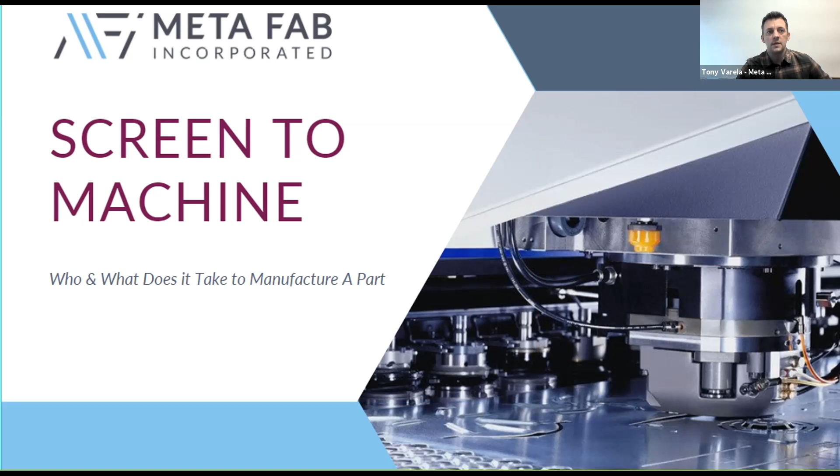So with that said, we will get into it. Today, the talk's called Screen to Machine, and basically it's who and what does it take to make a fabricated part. And what I mean by a fabricated part, in our world, it's sheet metal. So, taking large blanks of sheet metal, cutting them out, forming them up, and what do they ultimately become?

So today's agenda, my hope is your takeaway from today's conversation would be an understanding of the different types of sheet metal that are out there. It ranges from structural sheet metal, which we all come in contact with in large commercial buildings or schools, thinking of stairways, railings, large heavy steel. We don't do any of that here at MetaFab. We do real thin gauge.

So the whole world goes from large structural sheet metal all the way down to really thin gauge sheet metal, making boxes and enclosures. I also want you guys to get to know your local friendly neighborhood fabricators, and if you're coming from across Oregon, then your local statewide fabricator. Also, I want you to understand the whole process from design intent all the way through to the quality inspection and delivering good parts and what it takes.

We'll take a look at a couple examples of what it looks like as parts go through the different processes. And then at the end of the day, hopefully I'm leaving you with some resources where you guys can learn more, maybe classes you can be taking as you think about the next level, whether it's community college or a four-year university, or going straight into the workforce. So we will jump in here.

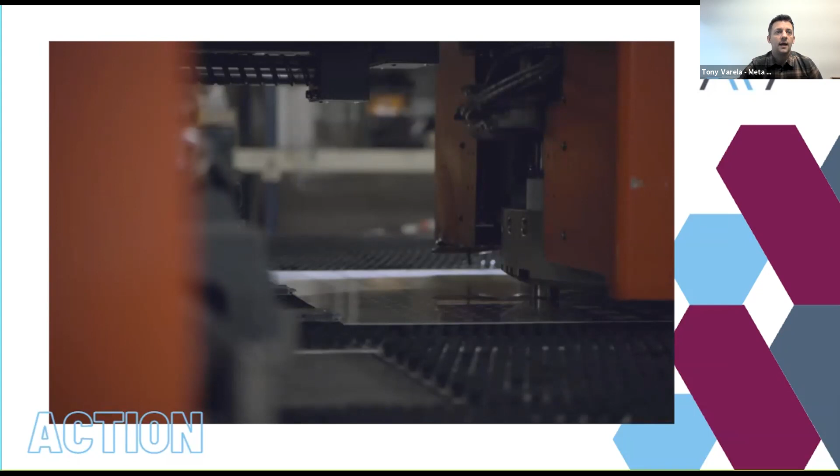So yeah, I've got some videos here. Like I said, it's the technical side of it. I'm gonna see what I can do to share that, and let me know if we have any issues on your end. So I'm gonna hit play here. You can let me know if you can hear it all right.

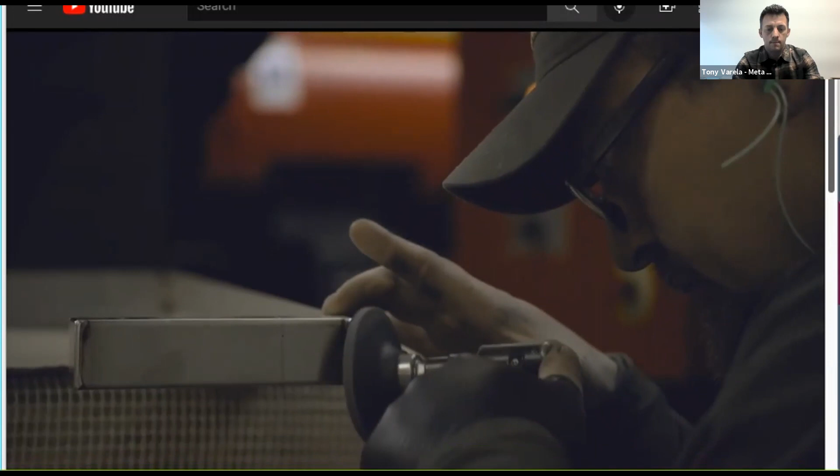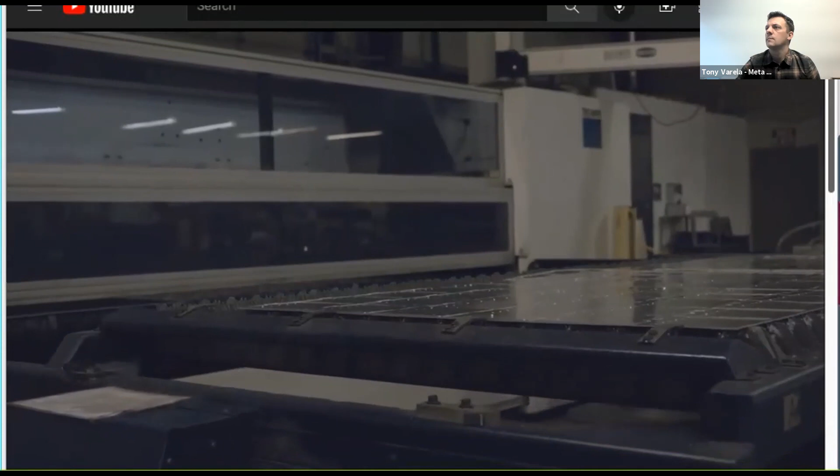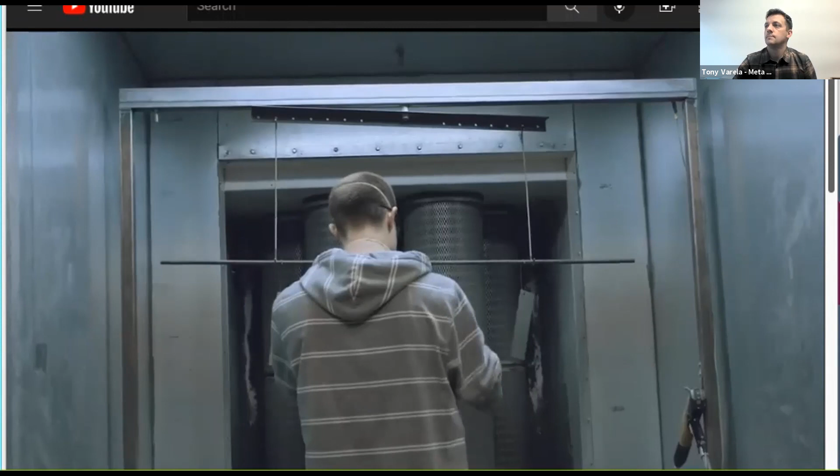MetaFab is a quick-turn, innovative, single point of contact metal processing facility. And we have the ability to take people's ideas and then turn them into a reality. Pre-concept to completion, we're here as your contact to get your products to market, because it goes beyond just processing metal or just taking orders. We want to be a part of that solution. The vibe here is very energetic, very positive, happy. You can feel that excitement of what's going on here. One of the things that I like about working with MetaFab is that they can fabricate parts as fast as I can design them. And I can design pretty fast. Everything is under one roof. Any service that I need to fabricate a part, they can provide it.

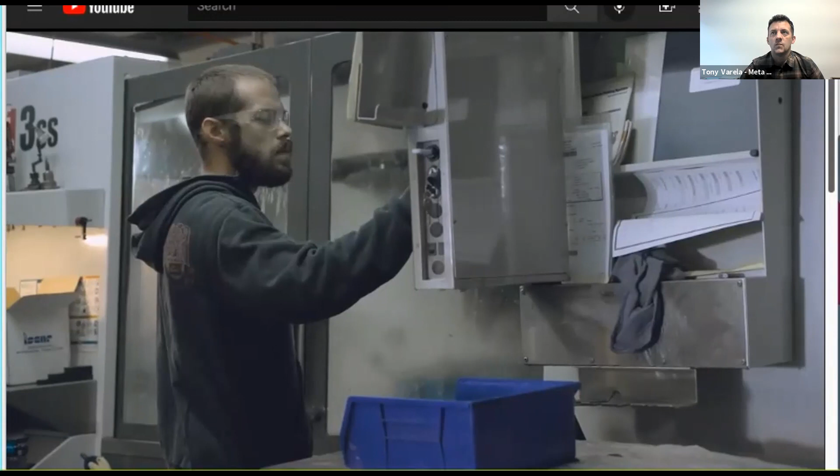I think the thing that sets MetaFab apart from most of our competition is our willingness to take challenges. It isn't about just today, it's not just about tomorrow, it's about the future of what we're really trying to build. Things are changing, and today things are changing faster than they changed yesterday. And we invest heavily into new equipment, we invest into our employees, and both of those things are keeping us on the forefront of what the industry is doing. What I see is a company that I can trust. We're very customer oriented. We treat everybody as we would like to be treated. I consider myself a very, very blessed man. I get to come in to a company and do something that I absolutely love. And I love sheet metal. I love working with people, and I truly enjoy what I have.

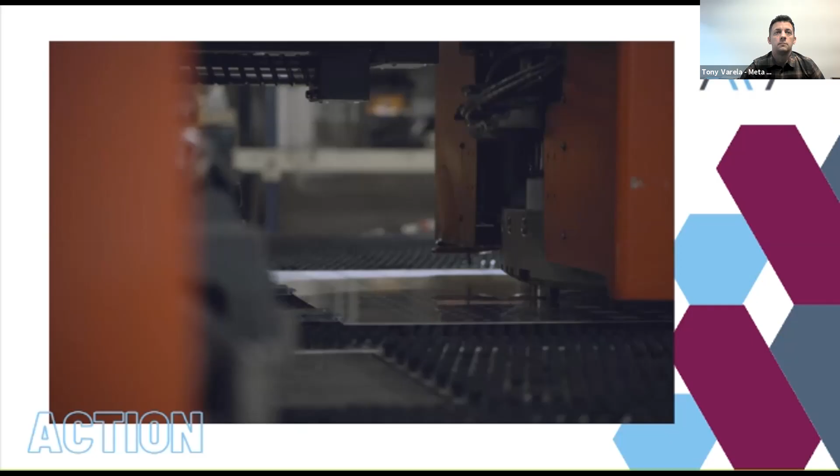So that was a quick little video about who we are as a company, MetaFab, a little bit about me, your presenter, super genius. I did not pass 4th grade CPR training. So we wear a lot of hats here at MetaFab, and they're always asking what kind of title I have there. So I always like to put super genius, just a little joke on, you know, doing a little bit of everything here.

But more on a serious note, who am I and where did I come from? Like I said, it's a family business. My father bought it in 2002, but he has been in sheet metal since the late 70s, which means I grew up in and around sheet metal. When I was in school, picking different career tracks or school options or what I was going to do after high school, I was really interested in architecture. And actually that comes from my time at Westview High School here in Beaverton with Coach Kamakaala.

I'll show a video a little bit later about that. But basically, I really enjoyed building things. I like designing, and it just made sense that architecture was a great option for some of my natural talents. But that being said, that was one of a few different options that were put in front of me. I didn't have a whole host of all the different possibilities available out there.

So I ended up going to University of Oregon. I got my professional degree in architecture down there. And then I worked and consulted for a few years and did some design work. And then eventually in 2010, I ended up joining the family business here at MetaFab. For a while there, I ran a small e-commerce company where we made consumer electronics, making flight simulator controls for people's home computers. And that was a lot of fun.

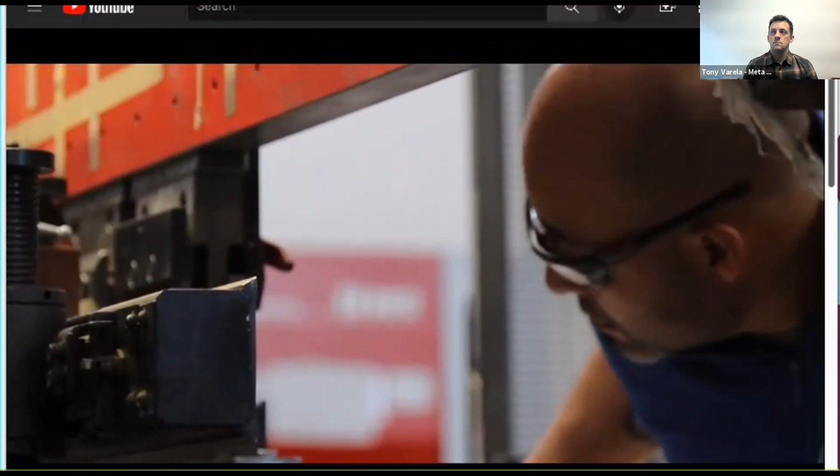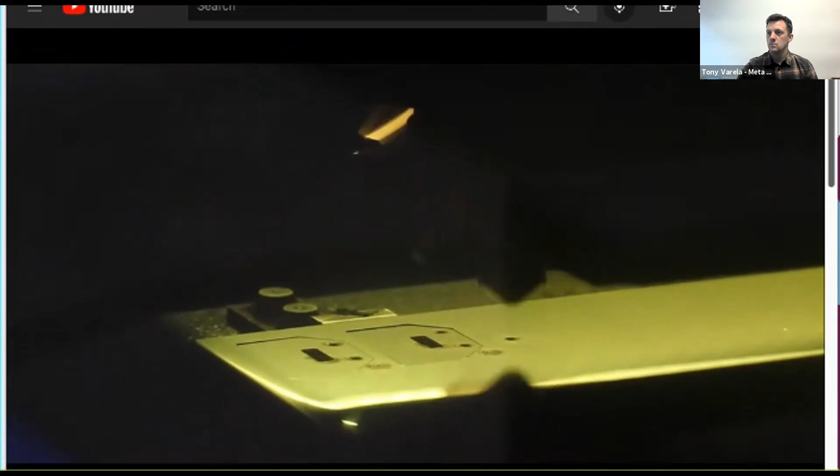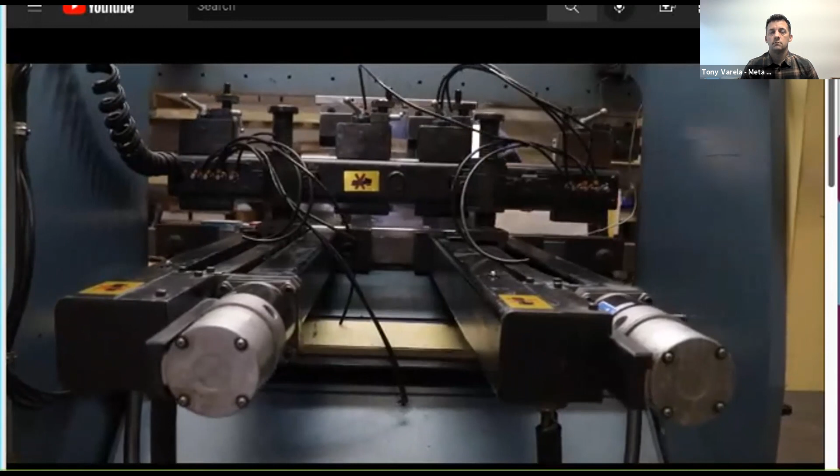My name's Tony Varela. I graduated from Westview High School. I work at MetaFab with precision sheet metal manufacturing. So for someone who might not have a background in metal fabrication, what could a day look like for you? So what I do in the sales and marketing role is I actually get out there and I meet with a wide, diverse set of customers, and whatever products they're looking to fabricate, we can help them find that solution. And that means any parts that end up on commercial airliners, sports cars, even consumer electronics. Without anybody knowing it, you've probably come into contact with parts that we fabricated right here.

What did you do after high school? What did you think you were going to do?

Looking back at both middle school and high school, there was a couple of courses that really stood out as things I was really excited about, and that was generally shop. So in middle school, it was a shop class at Five Oaks.

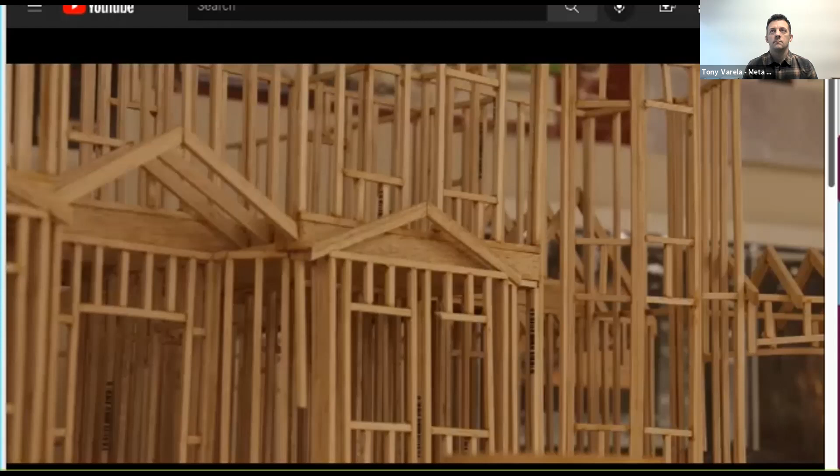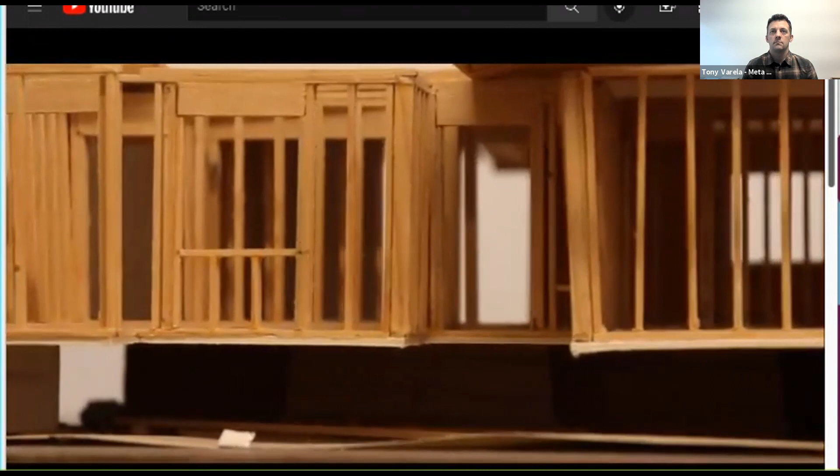And then at Westview, we had an intro to CAD, computer-aided drafting with Coach K, where we designed a cabin and then built a scale model of that. From his class, what really resonated for me was going from the CAD model we drew to building the scale model, actually building something that was once in a 2D computer screen.

I think that's where lights kind of went off and said, okay, that's where it really clicked. This is something that people do.

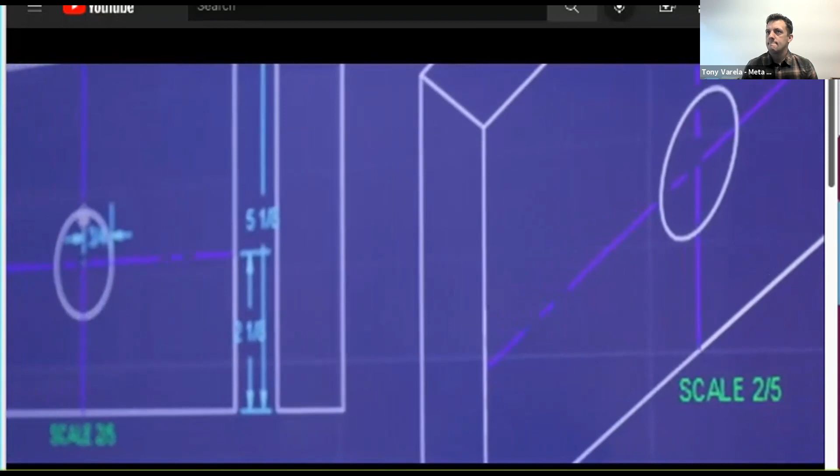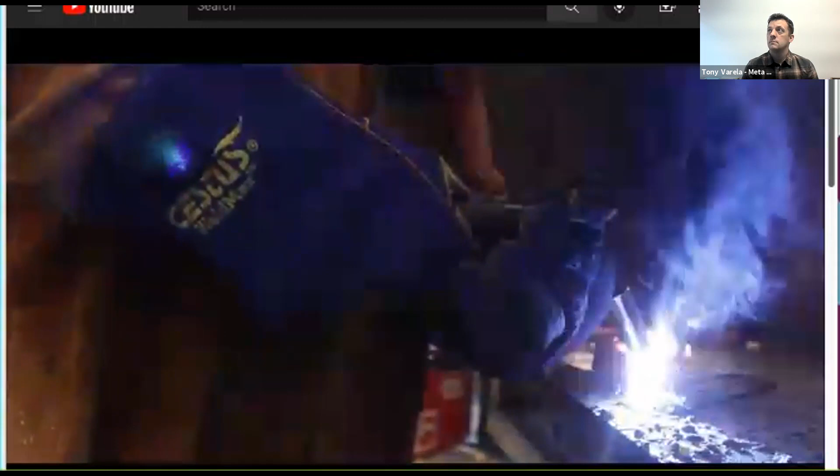That's Coach K. He teaches manufacturing and design at Westview. CAD 1, these dimensions, okay? They're not wrong, but if you have a lot of dimensions to put on here, it would get awful confusing. I would say, drag this dimension all the way through and put it on the outside.

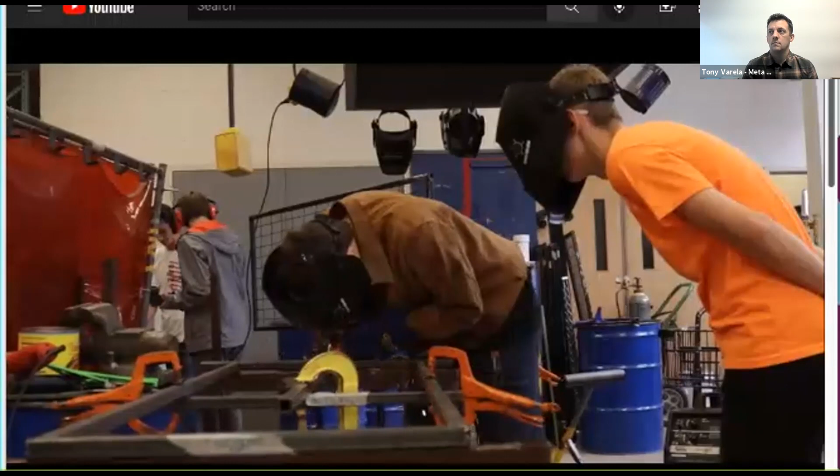Here at Westview, our kids are able to do a ton of different industry skills. And we don't say, go master it. We say, expose yourself to it, immerse yourself, and when you leave our school, pursue your interests.

I ended up traveling for a year, and then after that decided college was the next step. And because of that shop class with Coach K and building and designing a cabin, I really took to architecture. So I actually went off and got my degree from the University of Oregon in architecture design.

I went down the architecture road, and then I went out and did some consulting on my own. After that, I decided I would come back and work for the family business in sheet metal manufacturing.

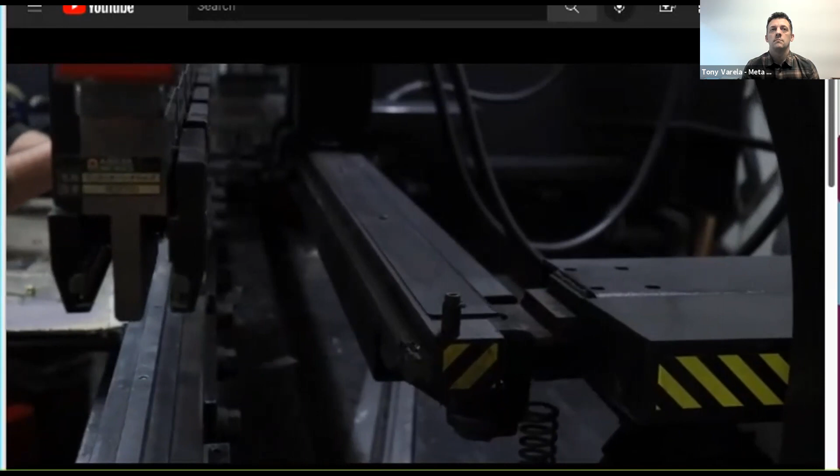Do you have to have a degree to start working here? No, you don't. And I think that's probably one of the things I want to really touch on the most, is that you don't even need the degree to become an architect like I thought I did when I graduated. Interesting. It's a great thing to have, and it definitely affords you a certain fast track in some regards.

But it wasn't until I started working with my first architecture firm that I found there were others that decided to go directly into the workforce. They started as a draftsman, got sponsorship from the company, and after putting together a certain amount of years of earning an income while also gaining valuable job experience, they were at the same place I was with my advanced degree, and we could have both become architects.

So roughly the same time frame. So one had 5 years of earning potential, and the other one incurred a lot of school debt. Let's go there. Yeah, let's absolutely talk about school debt. I think this is a conversation that we're really wanting to have more and more, and with more transparency.

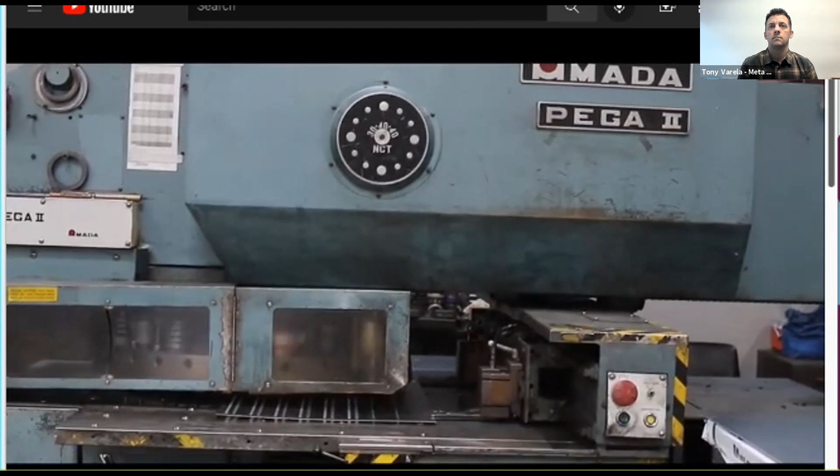I'm coming up on 20 years removed from high school, and I still have 2-3 years left of paying off those student loans. Again, a lot of good skills that I learned from college I take with me into manufacturing, but that's quite a big debt load to carry for 20 years, and I don't think a lot of people realize that there's a lot of other avenues to take outside of high school than going directly into college.

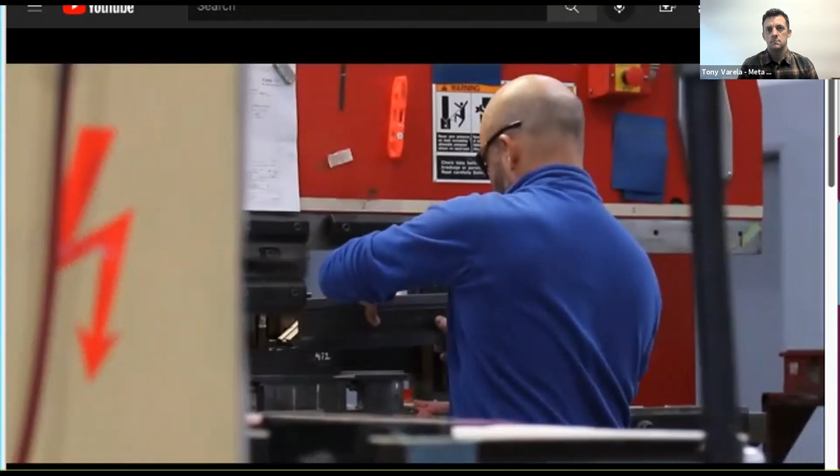Maybe get out into the workforce and find something that you like to do, and then you can realize what certifications or what degrees are required for that, and then you can actually get sponsorship through your employer, or you can utilize other programs that are available to you and end up with less of a debt load, but also earning potential along the way.

One thing I've been thinking about a lot lately is I now have kids. I'm starting to have conversations about their college and how much we have to save for. Our financial advisor told us to plan for $250,000. And I told him absolutely not. I don't know how you ever make that money back. Something's gonna have to correct. It's either gonna be the trades or it's gonna be other options.

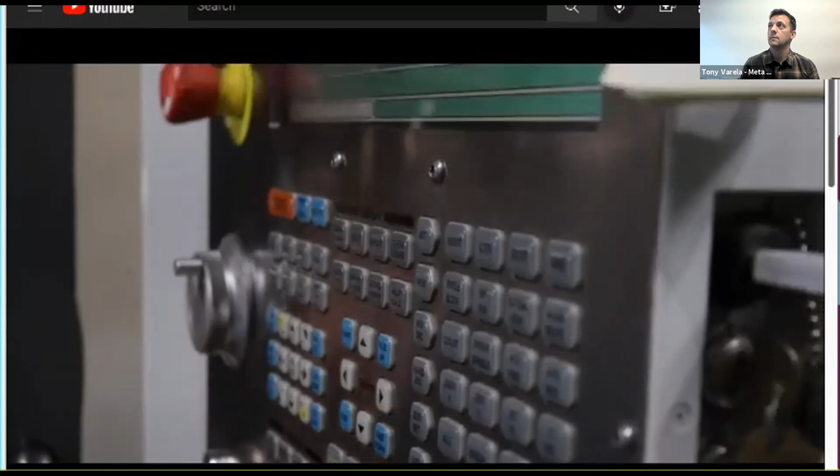So in going through the shop, we saw all sorts of different processes, technologies, a lot of different roles. How does it work when someone wants to come and work for MetaFab? A lot of the positions we have we consider entry level, and really what that means is that you're going to get the majority of your training on the job. That's one thing we talk about a lot in these meetings with school districts.

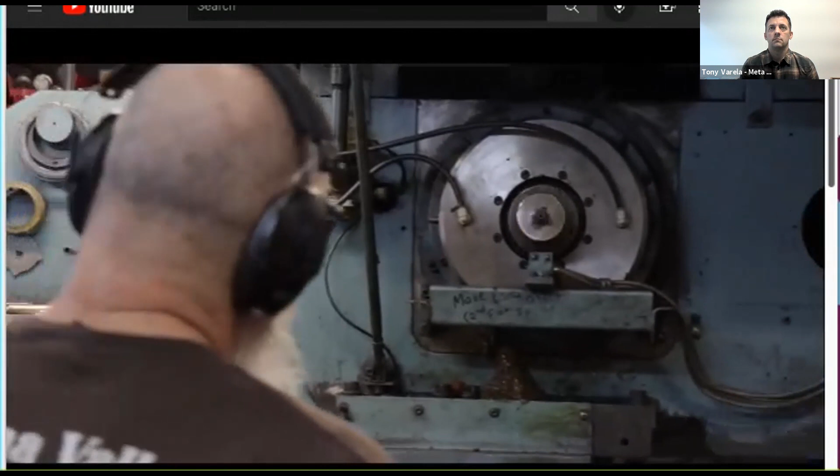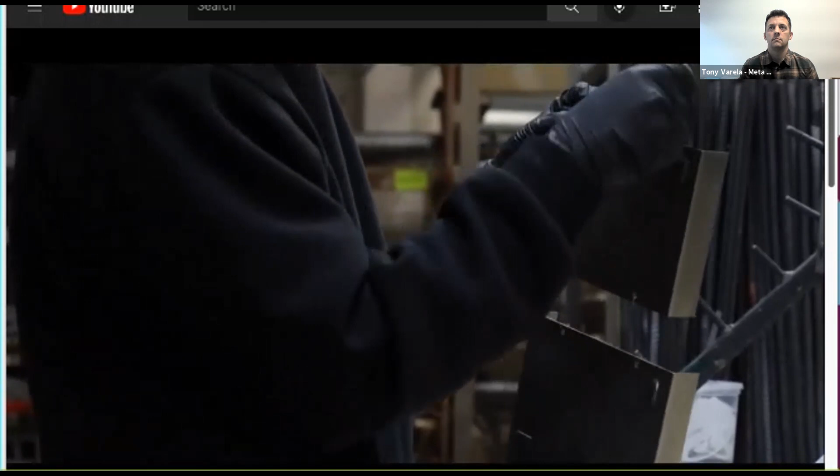They always are asking, what can we teach our students today that will help get them ready for a life in manufacturing? What kind of mathematics skills can we give them? What kind of physics or science? And really the answer we keep coming back with is just the soft skills. Some folks were even just working on handshakes and just being confident in who you are and where you're at, and understanding that what you're bringing to the table is just that - it's yours, your own story - and just showing up present and eager to learn.

All right, I hope you guys enjoyed that video. I think it's a pretty poignant topic of what a lot of people are talking about these days. It just shows that there's different pathways out there, and no one way is the only right way. So let's dig into a little bit about manufacturing, and we can come back to that conversation more towards the end.

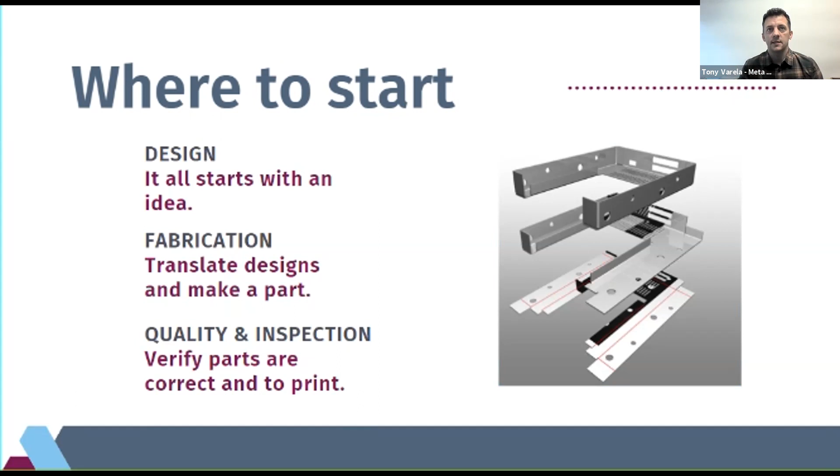So what we talked about within manufacturing and where MetaFab sits is you start with the whole process - there's the design process, fabrication, and then quality inspection. If you look at that image on the right, material comes in large flat sheets, then it gets designed in a computer program, cut out into those big shapes, and then through different equipment that we'll see a little later on, it gets formed up into the different shapes used in boxes, chassis, electronics, and all sorts of products.

So we'll dig into the design side. How many of you have taken any kind of CAD classes or design classes within your high schools? You can leave it in the chat. What kind of software are you guys using? I'll give you a minute here if you want to drop some comments.

So I've left a couple options here on this slide - some of them are available to high school level folks, some of them are used in a much larger business scale. AutoCAD is what I used, was what you saw the students using at Westview High School, and that's what I've used with Coach K 20 years ago, and it's been around a lot longer than that, but still used widely with drafting. Fusion 360 is a great tool through Autodesk, and I think they have a free student version. So if your shop classes aren't already using that, you can talk to your shop instructors about getting some of those copies, because that program allows you to do mechanical 3D design, and then you can export those to different software.

To allow you to program machines and actually fabricate parts. And then of course, SolidWorks - it's kind of the industry standard. It's what we use at MetaFab, it's what most manufacturers are using these days. But again, all three of those can get you where you need to go.

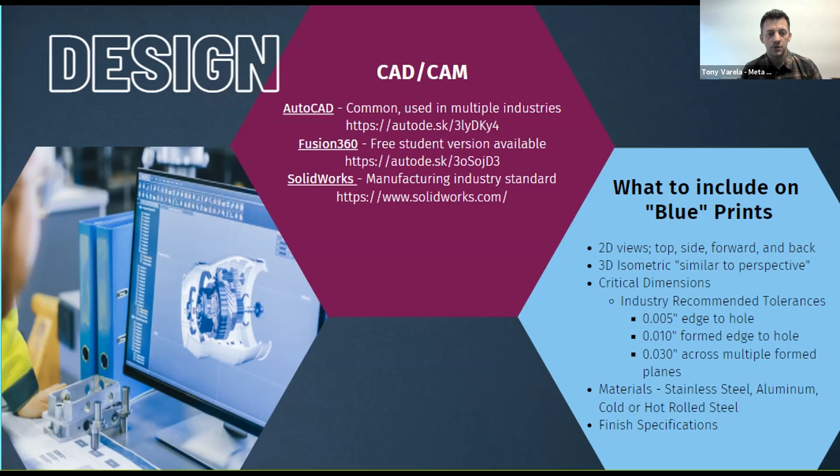With the CAD software, generally what you're doing is putting together a set of blueprints. They're not blue anymore, they're generally white, but blueprints is just a way to translate that language of the design intent to the fabricators of how these parts get made. There's a couple key items you want to include on all your blueprints - your different views. So there's your 2D views, generally a top view, side view, left, right, with different dimensions. Then there's a 3D isometric view, think of that as a perspective view, where you've got one face and your other face trailing off in the background, which gives you a better, more 3D kind of view.

You also want to include the critical dimensions, materials that you're going to use, and finished specifications. That's the kind of information we're always looking at every day, reading different blueprints and prints from all of our customers. To give you an idea of where MetaFab fits in, I was talking about precision sheet metal, the opposite end of structural heavy gauge, stairways and railings.

We do the thin gauge small stuff, and we're dealing in precision tolerances, dimensions of 5/1000ths of an inch, 10/1000ths of an inch. To give you a good idea of how small that is, a piece of paper is about 3/1000ths of an inch, if I have that correctly. So basically we're dealing in half a sheet of paper to 2 sheets of paper when we're talking about lining up different features like this edge of a hole to the edge of a part.

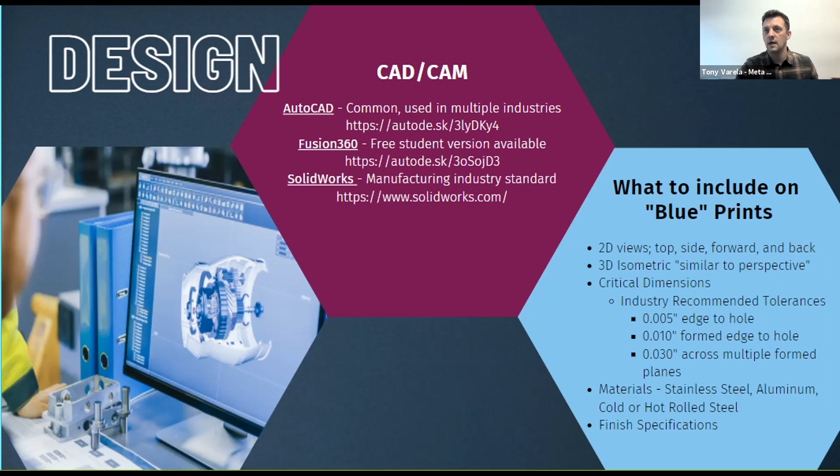And then there's forming. Here's the sample parts I was going to talk about. It's just like a flower vase or a candy dish, but that's the formed version. We did this one all by hand just to show, but here's a powder coated version of it in the flat form. This one's all cut with the laser, so the laser cuts out all these different shapes in the flat pattern. It comes in one large sheet. We cut a whole bunch of these out, and then through the press brakes, a tool and die comes down and forms up the different flanges that you need into a shape like this.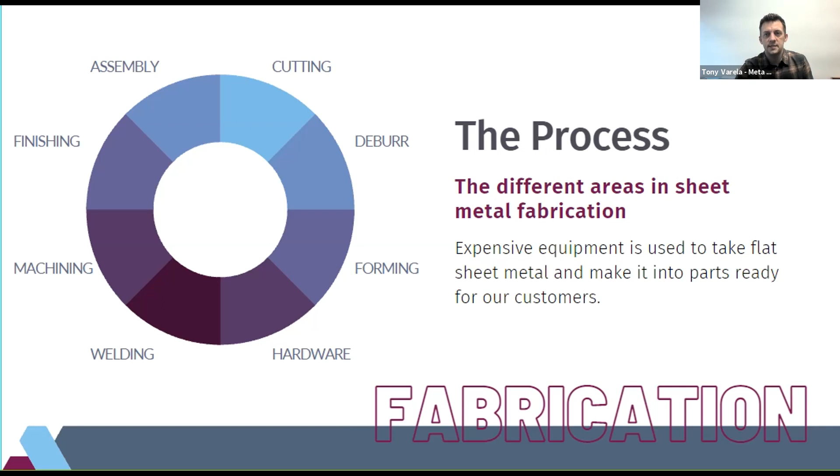So we'll go ahead and jump through some of the processes here, and then what I'll try to do is translate what kind of skills you would want for each one of these areas, or what operators need to be aware of for each one of these processes, to help you get an idea of what people are doing.

As I mentioned, here at MetaFab we have a 4,000 watt fiber laser. That's exactly the piece of equipment up in the picture there. Operators generally have to be pretty good with operating systems and user interfaces. If you work any of your social media apps or your phone, you're halfway there, so I don't have any suspicion that any of you would have difficulties with that. It's generally people like my folks' age who are just punching buttons and have no idea what computers are. So it still exists, I promise.

Then the other one, the cutting, is the punch turret I'd mentioned. Those are large hydraulic punches. It's a tool and a die - a top piece and a bottom piece. Basically it's just large hydraulics that come down and punch the metal out into different shapes. We can punch up to 30 tons of pressure in one of those punch machines. We have 3 turret punches here at MetaFab.

Graining and deburring is, like I had mentioned, sending it across a sanding belt or a graining belt that just removes a layer of the material, removes the sharp edges. We also have some automated cobots that help us load some of these machines, which is actually pretty exciting new technology.

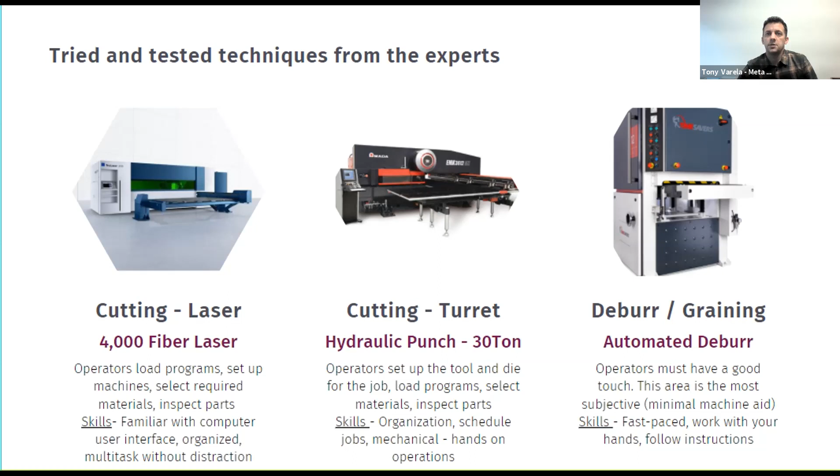As we're getting into Industry 4.0 and everything's becoming wireless or automated, that's a little bit of room where MetaFab has started seeing some automation. That's been a lot of fun with that project.

I mentioned earlier that when you have the cutout part, the outline, you have to form it up into different shapes. That is all done on press brakes. We can do up to 80 tons of pressure bending this thick material, and we can bend up to about a quarter inch thick of material on our press brakes. There are much larger press brakes forming bigger pieces of metal, but we stay away from those thicknesses.

All of these different areas are going to have operators that like working with their hands. There is some user interface you have to be good with—selecting programs, loading the programs—but a lot of it is working with your hands, setting up the different tools and dies. You take your piece of metal, set it between the tool and die, keep your fingers clear, press on the pedal, and that forms it into the shape you need. Then you pull that out, put the next one in, press down, and it forms that up into the different shapes you need.

The hardware insertion is a similar sort of thing. It's just a hydraulic press that presses the hardware, allowing people to take electronic motherboards or any kind of circuits and screw them into the electronic enclosures. Think of your computers at home—they're built with a sheet metal chassis and structural components internally. If you've built a computer, you know exactly what we're talking about. You take off those side panels and there's a sheet metal structure with screws, where you're screwing on your motherboard, power unit, and cooling fans. That's exactly what hardware insertion is.

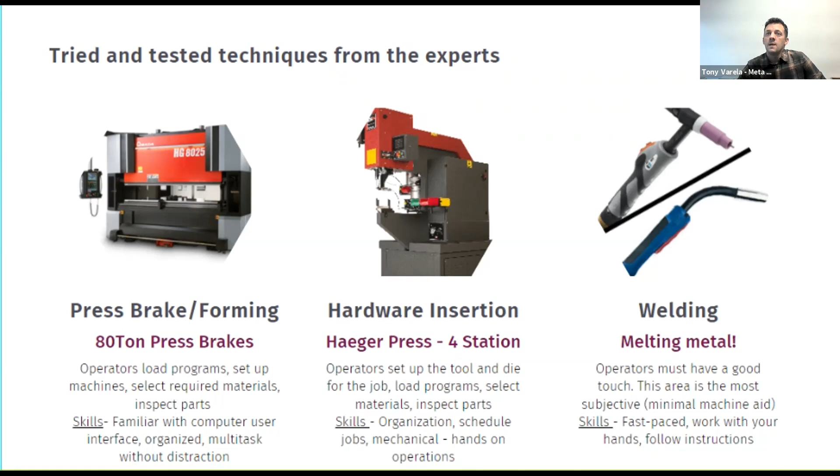The next steps are machining, and I had mentioned powder coating and assembly. Machining you hear a lot about these days—it's called subtractive manufacturing. A lot of college courses teach subtractive manufacturing or additive manufacturing. Subtractive manufacturing is where you're taking a block of material and using mills or drill bits to remove material from the block along designated program paths. That's subtractive manufacturing—you're removing the material.

The hot buzz of the day is 3D printing, which is additive manufacturing—applying material to a template and building up your part from that. They are starting to 3D print sheet metal, which is really exciting; it's essentially just layering weld after weld of material. There's a lot of excitement around 3D printing, but what we primarily do is just called flat work—forming sheet metal, like I said.

Powder coating is applying a plastic powder that bonds to the part, goes through our large industrial oven, and bakes at 425 degrees, melting together into a real strong, durable finish—again, for corrosion control.

Then we have assembly, and I've got a little photo here of Lego figures being assembled. I love Legos—I'm 40 now and I still collect some and build Legos with my kids. I've always said if you like building Lego sets, assembly is something you'd really do well with and enjoy: following the instructions, using screwdrivers, nut drivers, those kinds of things, to assemble the fabricated parts we make here, pulling them together and building larger assemblies that then get sold to our customers.

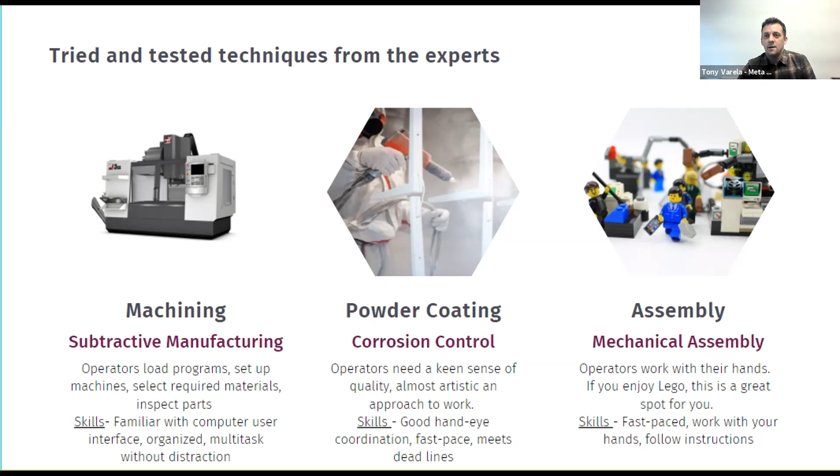So the next one we talked about was quality and inspection. So we went through the design part. You use CAD to come up with the ideas and then figure out how this thing's going to come together. And once you've used your computer-aided design software to model it in 3D, you unfold it to make sure all your dimensions are correct. And then you come to a manufacturer like MetaFab and you give them your prints and say, all right, have at it. You're going to manufacture this for us now. And we go through all those many steps that I just shared with you. And then you got a finished part.

And at the end, you have to make sure that that part meets all the quality specifications for your customer. Here at MetaFab, we prescribe to ISO 9001, which is an international quality standard, and it just guarantees that we're following the same processes every time when we have parts or a project that comes through our shop.

That machine that you see on the left there is called a CMM. It's a coordinate measurement machine. Basically this one's really cool. You have that handheld wand, and it casts a camera to your part that's on the tombstone, and you place the probe on the different parts, and it can measure up to 1/1000th of an inch, which is, I don't even know what that is in millimeters, but it's still fractions of a millimeter even. And that gives us just a real precise measurement of how these parts are turning out. And so we like to say at MetaFab, we deliver confidence 100% right, 100% of the time.

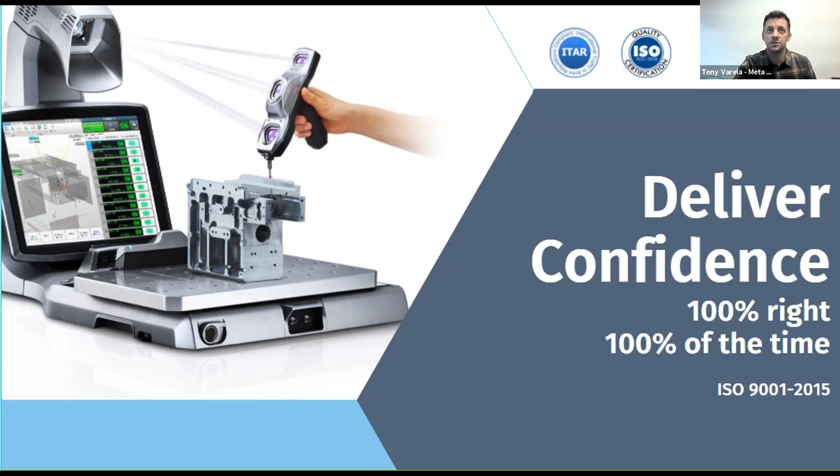And this is our ISO certification. And then we're also ITAR registered, which is also a quality standard mostly for government work. It stands for International Traffic in Arms. And so as you can imagine, there's some government contracts that require that kind of designation.

So with quality in mind, of course, got to reduce mistakes. And mistakes do happen. And so part of that ISO standard is talking about what do you do as a manufacturer to, there you go, great. What happens when something doesn't meet quality standards? Is it thrown away or recycled? Both of those, so it's recycled. Worst case scenario, all of our material does get recycled.

There's a couple steps that happen before we have to make that decision of whether we have to recycle the material and then rebuild. Oftentimes you can salvage a part if it's out of tolerance, or if something's incorrect, you might be able to rework it. And that's a conversation you're having with your customer.

To give you an idea of the level of requirements that we're held to, we kind of measured in parts per million, which means we may not do 1 million parts throughout the year, but you take a ratio based off of how many parts you have going through your shop and how many parts are bad. And a lot of the goals that we have are, it's the tens of thousandths of a point.

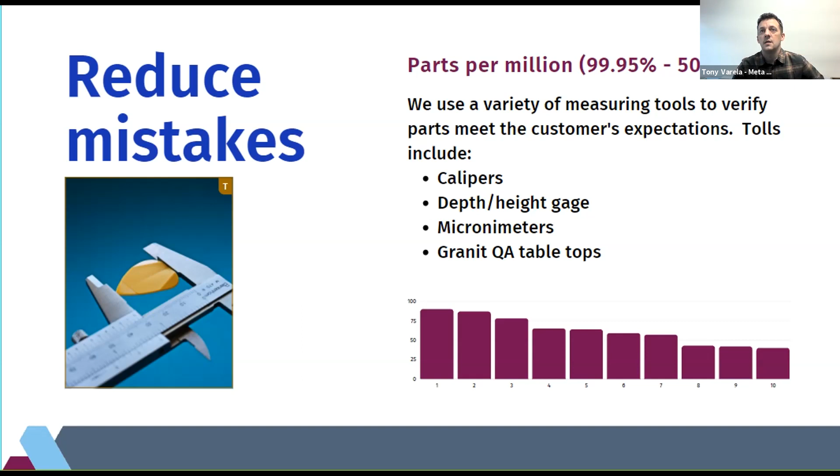To measure the parts, I had mentioned we have that CMM machine, but then we also have calipers, depth and height gauges, micrometers, that's a hard one to say, and then granite QA tabletops. And the reason we use granite is it is extremely smooth and flat. So you can place a part on that and you know that over the course of 4 points, do you have a flat planarity, or do you have some sort of warpage and wobble?

And those are just tools that we're able to use to see how out of tolerance we are. And most parts, I say tolerance, that means plus or minus a certain amount of distance that you're allowed to be within. So that's the kind of space that we're operating in.

For QA standards, I think a QA engineer, somebody who is meticulously detail oriented, is going to thrive in that position. Just making sure that all of your T's are crossed, all of those I's are dotted, and then poring over a lot of data to make sure that that stuff's right is a great spot for somebody who is looking for that type of work.

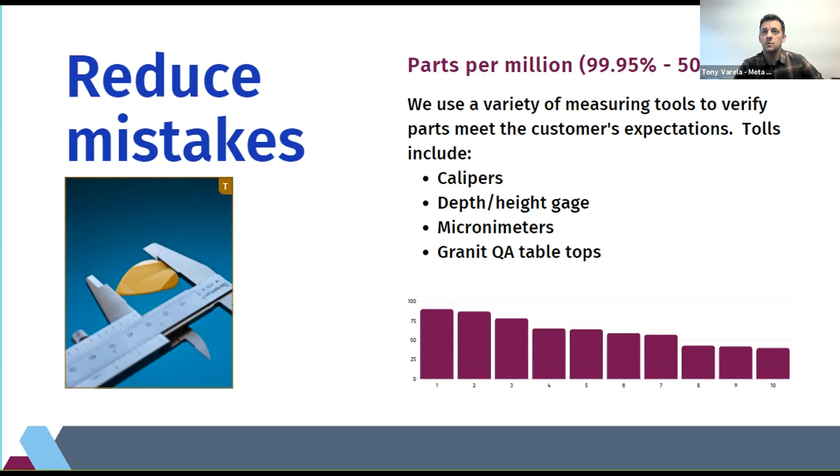So we are kind of wrapping up towards the end of the presentation. We got what's next. Like I said, hopefully I can leave you with some resources and some of my opinions on some possible steps forward. Of course, what's next? You can take more courses. Speaking to high school students, a lot of high schools are focusing on different areas of technical education paths. You can always choose one of those and take a couple courses to see what you like, see where your strengths are.

I always recommend, and I try to push educators when I'm having a conversation with them, that we leave it as flexible as possible and allow people to really explore and not get too narrowly focused on what that track is. Because I think that's what happened with architecture in school. You go out and you pick that degree and then you finish that and you get out and it's like, all right, all that's left is architecture. But there's a whole lot more that's available out there to you, and having that ability to explore is really beneficial.

So once you graduate, you can go to local community colleges and take some manufacturing related courses. I like that option because it allows you to get your feet wet and see what works best for you. The other option there is you can start in the workforce, and I'll have a slide about this later here. We're going to watch this video first, but again, I really like the idea of maybe getting a job in an area that you may like, finding out what certifications and requirements are required. And then you have some other possibilities where maybe a company sponsors the education that you need afterwards, and they actually fund your college or university experience if that's a possibility.

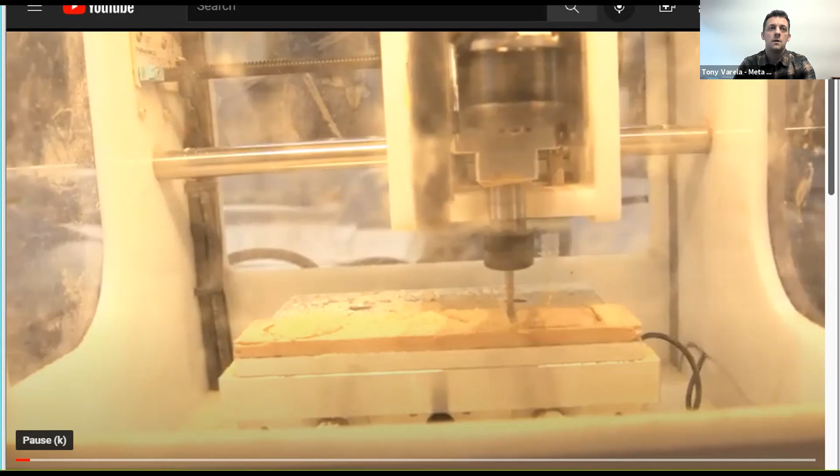I'm intending to take just one class or two classes and got really excited about what other potential there was. You can get yourself into a good paying job in a fairly short time frame. I'm planning on being a private contractor. It was everything I thought it could be and more. CAD stands for Computer Aided Design and Drafting, basically modeling objects or parts in a 3D space on your computer. You can use CAD programs to model everything from a Rubik's Cube to a chair. You could be designing things for IKEA, for Boeing.

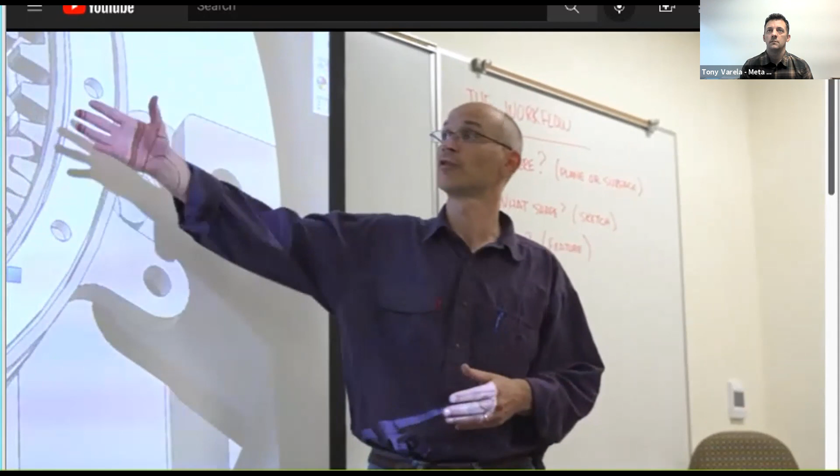With PCC's one-year certificate program, you're going to learn practical knowledge from those who work out in the field. You're going to learn modern manufacturing techniques, and you're going to learn the latest computer software. The field itself is very, very big. You can go into so many different fields just knowing how to use software like AutoCAD, Inventor, SolidWorks. By far my favorite class was the 3D printing class. You design whatever you like, and then you are able to put it into a 3D printer, and you can make it come alive. The best part is the instructors, really. They keep the class lively, keep it fun. They're keeping us up to date on, when you leave this program, here's what you need to do in order to get this job.

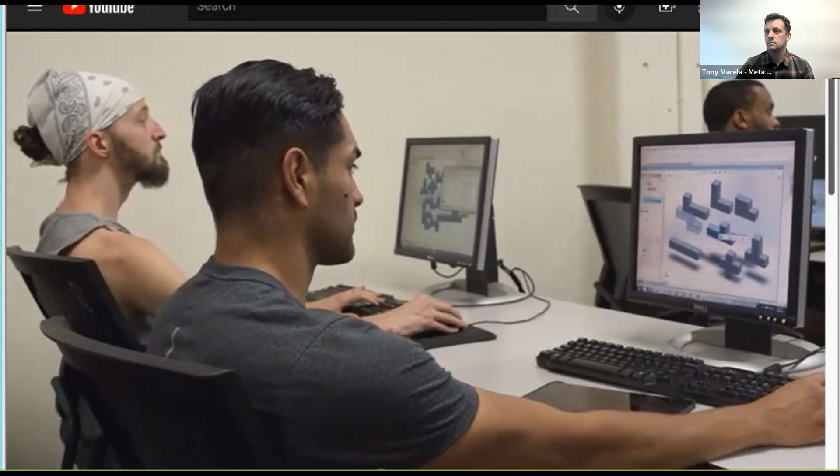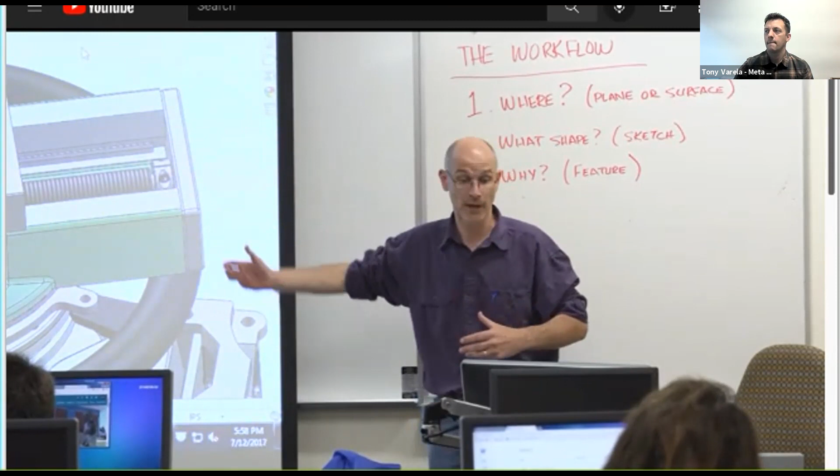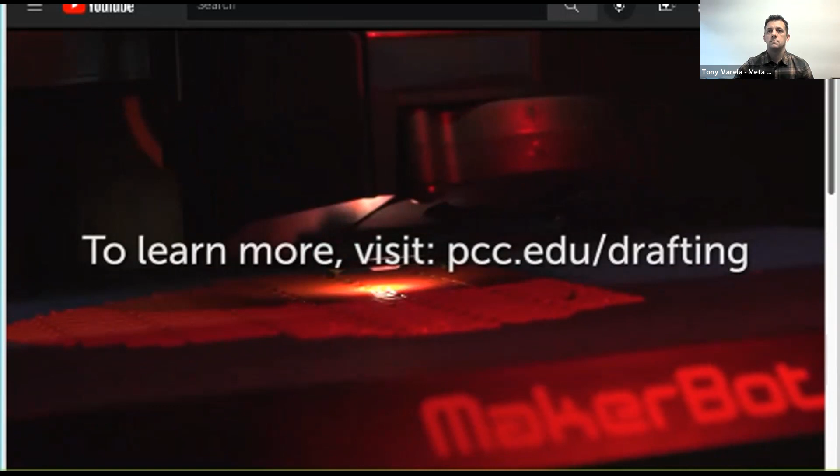Whether you're really creative and artistic or you're super meticulous and have an eye for attention to detail, everyone's got a place with CAD. I'm looking forward to learning more about what kind of jobs are really out there. As an engineering manager in industry, I'm always looking for that student who has been through the CAD program, who's had the same training that I had. About a year ago, I got a pretty good job using some of the skills that I've gotten from the CAD program. My plan right now is to use the CAD program to prepare for a master's program. I am a CAD designer because of PCC. I came in.

All right, so that's a course that's taught by Adam Scheibel. Like I said, he's our engineering manager here at MetaFab. There's a great question that came through the chat. Do you offer internships? We have a kind of quasi internship program that we've put together kind of unofficially. We don't have an official partnership with PCC. Therefore, it's not in exchange for credits, but it's a full paid internship that we offer.

We use the term internship because with specifically those types of drafting and engineering students, we are trying to look at it as an opportunity for them to work with us and get a good understanding of what manufacturers are looking for and building those skill sets. And then the idea is that it's a 6-month contract essentially. And at the end, we either have the option to hire full time, or ideally they go on to the next gig. And so the idea is that we constantly have a seat that's kind of revolving with students coming through. And so again, not an official internship program where we're exchanging credits for time.

It's just, I guess it'd be a paid internship. And the idea is that it's a time-based contract. Now, we have hired three or four candidates out of that program, and we probably had as many go through and finish that 6-month contract and move on. But they often go on to other customers of ours, and we continue that relationship and working together.